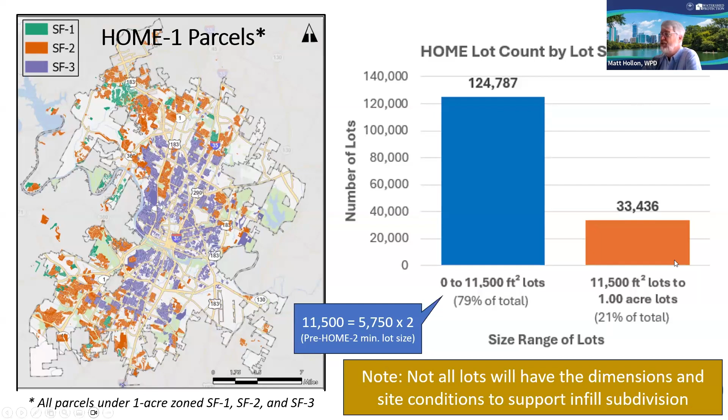These larger lots, the 33,000 that are larger than 11,500, are only around a fifth of the total. Not all of these lots, by the way, are going to be able to support infill subdivision for a variety of reasons. So this is kind of oversimplified, but it shows you the number of lots in these two categories—we can talk more about that during Q&A. Some of you will recognize some of these slides, which I initially created for our October 4th stakeholder meeting, where we had some good feedback as well.

So this is in Northeast Austin—it's basically almost literally a random neighborhood I picked out using our mapping systems, but I'm overlaying a HOME-1 project on top of this.

In fact, that's what we're seeing with the HOME-1 data available online now. Our DSD staff have put together a good summary of what's going on and how many permits have come in. Most of the permits are coming in as 2-unit projects, not 3-unit, although there are a fair number of 3-unit projects.

So let's say these folks in this project decide they own that property and say, hey, we're going to put 2 units in. Great, so they go forward with no fanfare. There's no drainage requirements for this, just like if you built a single home next to them, there would be no specific drainage requirements. You're not allowed to flood your neighbors. There's state laws and plumbing code provisions that kick in for drainage on individual single family homes, and that too would apply to a HOME-1 project. But there's no special drainage code that kicks in because this project is so small.

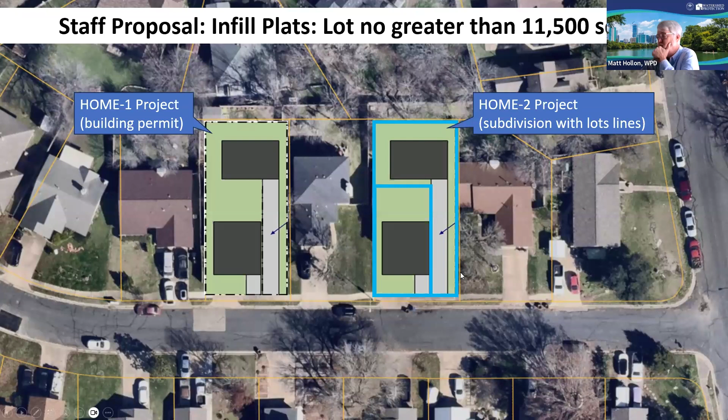But we put the applicant through a lot of extra steps to come up with this as a subdivision, because up till now we haven't had a way to discern between a very small project and a larger one. So our proposal is for these projects that are less than or equal to 11,500 square feet, that we treat it the same as we would a building permit project next door.

So same deal, no special rules, no additional anything. You're not supposed to create drainage issues and so forth, but at the scale we're talking about, we're not generally seeing very many of those kinds of issues. And there are recourses, and I know that's another community discussion we can have. But we think this is appropriate.

And when I show you the peer city review, our peer city of San Antonio has a really similar threshold of 10,000 square feet. It's very close to our 11,500, where they say basically the same thing, and I think we're in good company with that. They had some experience that led to that conclusion that I'll share as well.

So I already went through some of this. In the past, you couldn't even subdivide something of this scale or smaller, except with some cottage lot kind of oddity exceptions. So this will be the first time, and you wouldn't have to do a drainage study, you wouldn't have to do on-site detention, anything like that for this very small scale, because we're not asking that of individual homes right next door either.

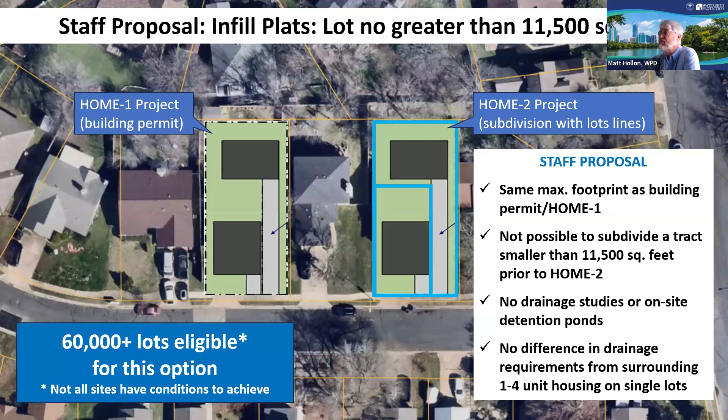Now there's probably many tens of thousands of lots that are eligible for this option at this point, so we're opening this up for quite a few properties.

So the planning commission proposal was much more broad, and they basically recommended that if any of these projects, all the way up to 1.5 acres in size, remain within their zoning impervious cover limits, that you would have no extra drainage requirements. At this scale, we're okay with that. Honestly, every single project is going to stay within their impervious cover limit, or that's the idea.

I know there are board of adjustment issues that pop up here and there, but generally people stay within their impervious cover limits and don't propose going over, because they'd have to get a variance and go through a commission process to get there. They also mentioned, it's a little wonky again, what the planning commission called the Dallas affidavit system for self-certification.

Dallas does have a system where, for individual single family building permit projects, if you're in the floodplain, you have to submit a grading plan for your project. But if you're not in the floodplain, the applicant can say, hey, I'm not going to create problems for my neighbors, and sign an affidavit stating that, and that they will rectify any problems in the future if they arise. We'll talk about that more later, but that's different than having city staff review it.

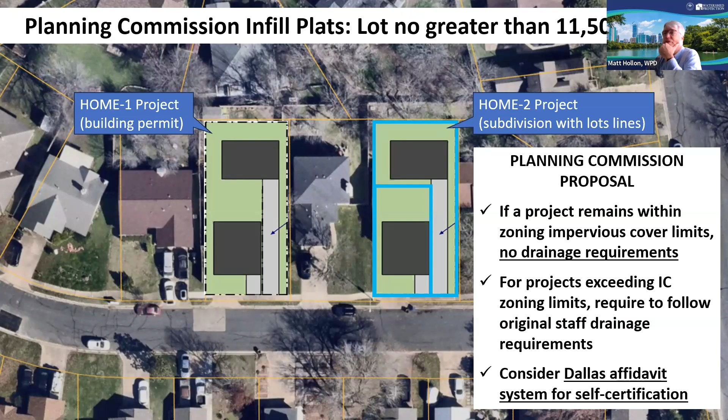Okay, so that's the planning commission proposal. So far we're not that far apart on this one small scale issue.

All right, so then we turn to the Infill Plat, to a larger size. You're above 11,500 square feet. Here's an example, a half acre project. City staff believes that this scale above 11,500 is large enough to warrant additional engineered or detailed attention.

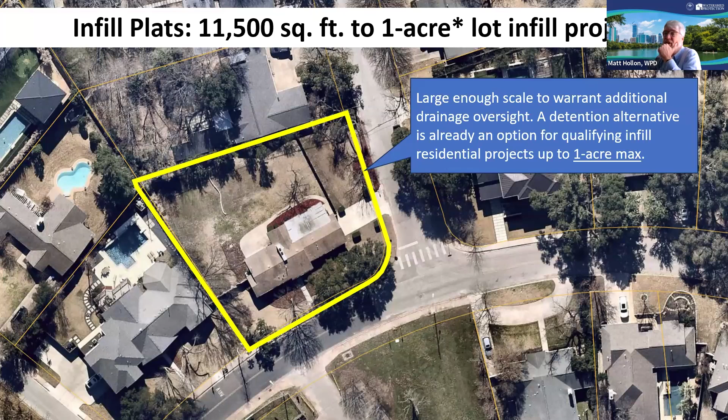We also recommend that it not exceed 1 acre in size for this option. That would mean if you're bigger than 1 acre, you'd follow the full code system, all requirements. So here's, I know this is a terrible sketch, this is me attempting to put some units on there, and I think it's about what could happen.

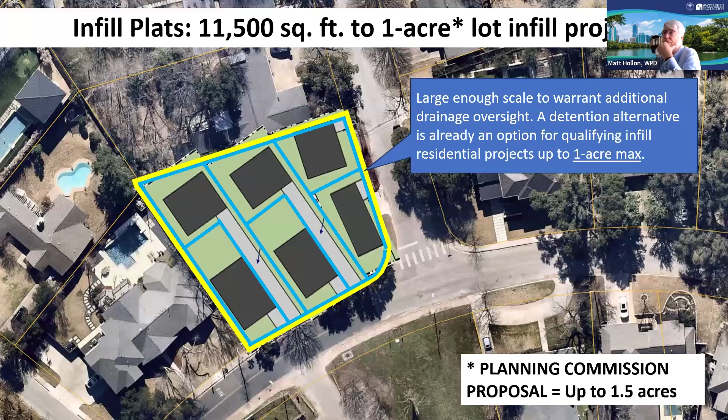The planning commission proposal did propose up to 1.5 acres. This is a half acre site, so it would be two more of these together, that's the scale they were recommending this apply to.

So our city staff recommendation - again the planning commission version did not refer to topography or grading or anything else. The staff version has more nuance to it.

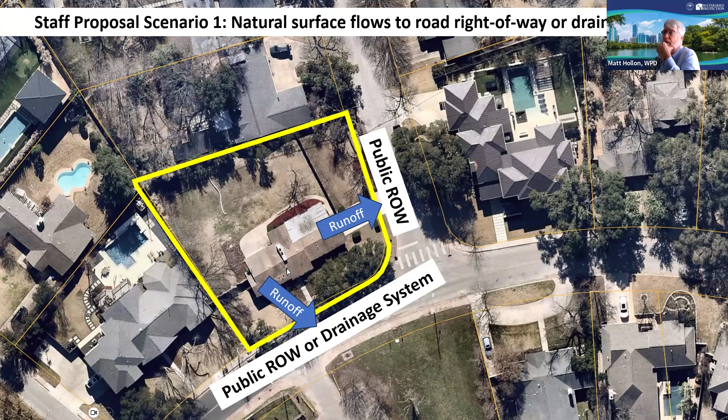Staff actually says, look, if you have a site where the runoff is conveniently going from your site into the public right of way, or maybe there's a creek next to you or a drainage easement, that's great, that's the best case scenario, that's where we want the water to go. So if you're in that situation, you can do a simplified grading plan where you just show where the water's going. Honestly, a homeowner could probably put this together using information off our website, and you wouldn't have engineered elements like ponds, or regional stormwater management program payments with this proposal.

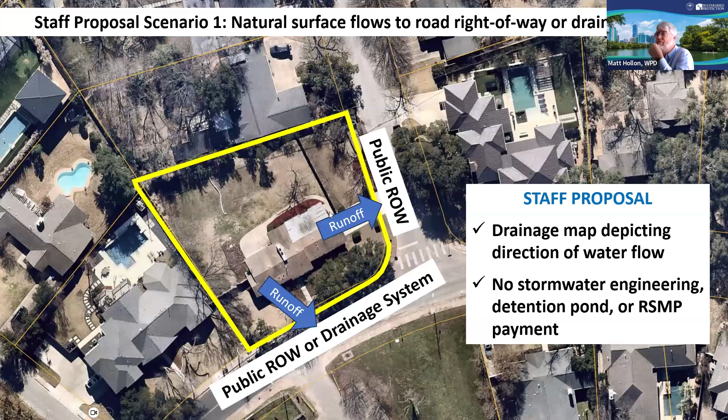Development community representatives, when they saw this, were like, hey, that makes sense, we like the simplified version. That's great, but not that many sites are going to just happen to all drain to the public right of way. So what happens if that's the case? What do you do?

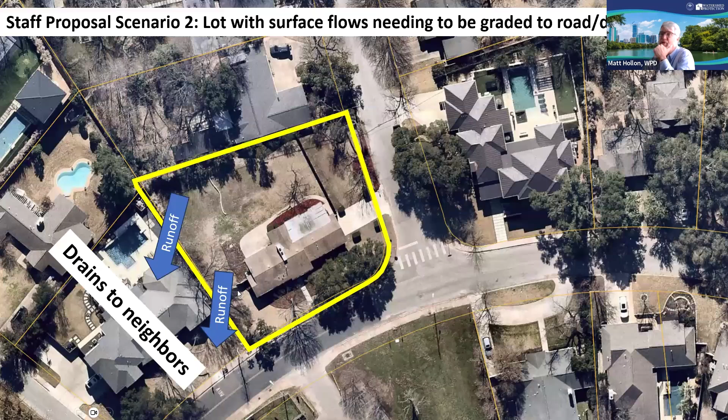That is the next scenario - scenario 2 of 3 - where maybe some or all of your runoff goes to neighbors. Maybe some of this is going to the street, but some of it is draining to the neighbors. In many cases, you can actually get in with some earth moving equipment and create a swale or French drain or other kinds of systems to redirect the water so it's not going on your neighbors, and get it to the public right of way system.

Initially, this is a little more complicated. We want to make sure that somebody gets this right and has oversight, and somebody with competency in this area is involved, to make sure there's a good plan and it gets executed.

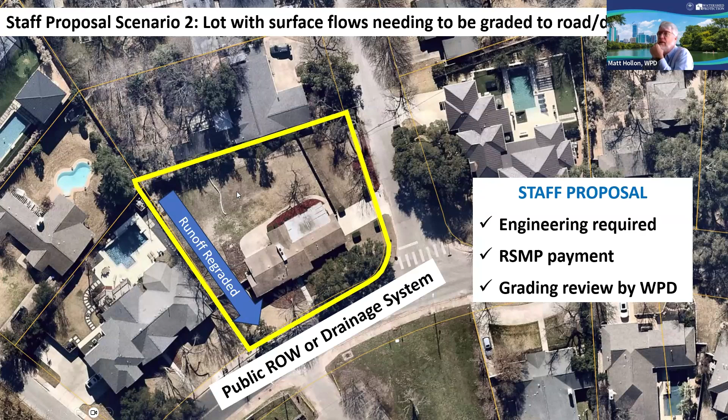So initially we proposed that engineering be required, and there'd be a regional stormwater management program payment. This is a really key point - we actually already have this in our drainage criteria manual. This system has been going on since 2019. We've been allowing projects up to 1 acre that are single family residential subdivisions to regrade and do this kind of thing, but we have oversight, we look at them, make sure they get their project done, and we ask for payment.

So in our updated version of the ordinance, after looking at and wanting to come together a little more with the planning commission version, we are agreeing to remove the regional stormwater management program payment, which on average has been, at least in the past, about $33,000.

It just depends on your site, the site conditions and the size of your site especially. But projects would probably save $20, $30, $40, $50,000, sometimes even more with this new proposal. That money was being used to put into a collective fund for each watershed that would be used for different projects, so watershed would need to shift a little bit to make sure we cover that.

But our department director said he supported that new plan.

And then we have grading review. Right now with the drainage criteria manual system we have in place, watershed protection staff is overseeing this, but our colleagues over in DSD are doing the same exact kind of review themselves for other types of projects, so we would be shifting that over to them for this proposal.

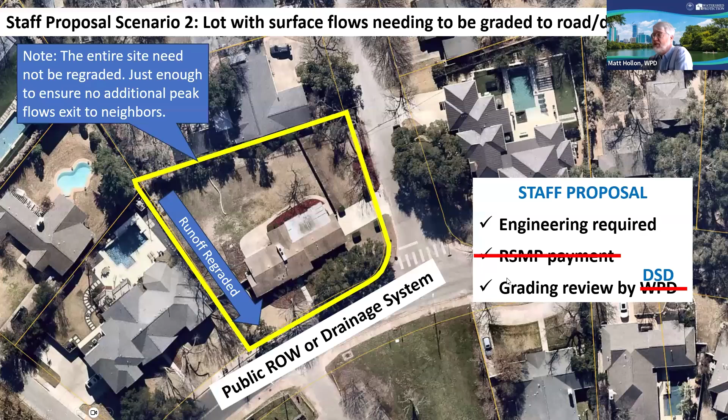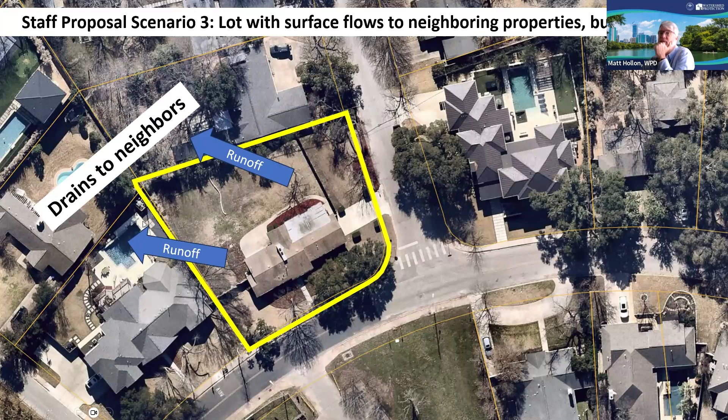All right, the third and final scenario on this one is that this water would just drain to your neighbors. And this, in fact, is what happens with this particular lot in the real world - it just kind of drained right to the backyards of these neighbors.

So our staff proposal is that you would continue, as you do today, to have to put in a small scale detention pond in this kind of project to reduce the flow rate of peak flows coming through your project during a big storm, to have an engineered control there.

And so in meeting with some of our development community stakeholders, they had met with some of their engineering colleagues that they work with, and a lot of folks recognize that something of this kind is needed when you have a big enough project and you've got enough water going off.

And we do - this is blue because we're changing this. We staff are wanting to look at some simplified detention options. We heard a lot of good feedback from stakeholders that building detention ponds was, especially for these very small projects, somewhat cumbersome and complicated and added a lot of cost and time to the projects.

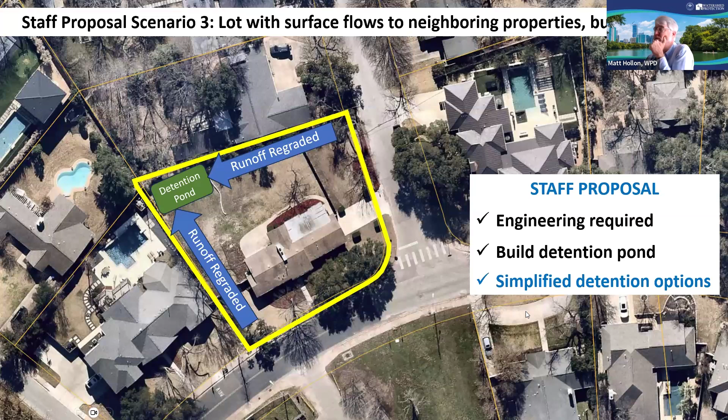And so we will be looking at whether there can be some simplified options such as rainwater harvesting or other systems that might be of use and might even be multi-purpose and helpful.

All right, and so then back to the Planning Commission proposal. This project, if it just stayed within its impervious cover limits, would not have drainage requirements all the way up to 1.5 acres, with no regard to the drainage - whether it goes to the road or back to the neighbors. So we staff just really have some concerns with that and don't support having it go to that size, and we don't really think it would be enough to have this impervious cover limitation.

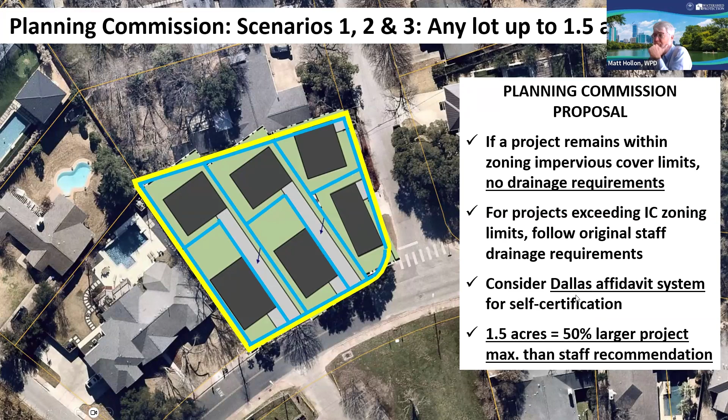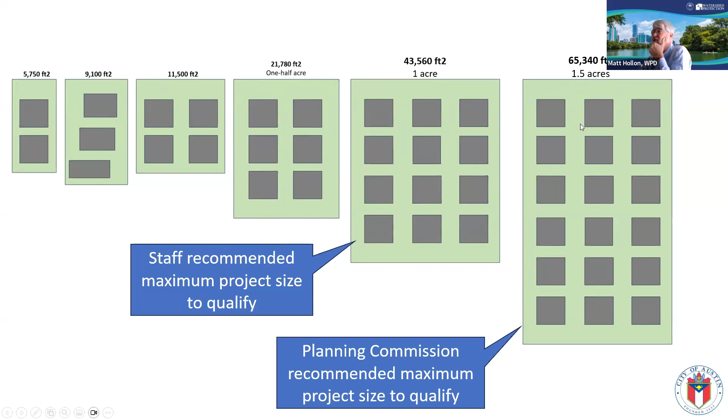But again, if any of these have some or all of their water running to neighbors, they'll need to either regrade or use detention. And then the planning commission version requested that it be boosted all the way to 1.5 acres. All right, so I'm going to go to site plan lite part 2.

These are small scale multifamily projects. They're not 158,000 lots like this - there's far fewer, only 7,000 or 8,000 of these in town at this point that are zoned like this. And honestly, a lot of these are pretty small and probably would have a real hard time putting more units on them that are already there. So anyway, some of our stakeholders have had good comments about the limitations that are already on these projects, these parcels.

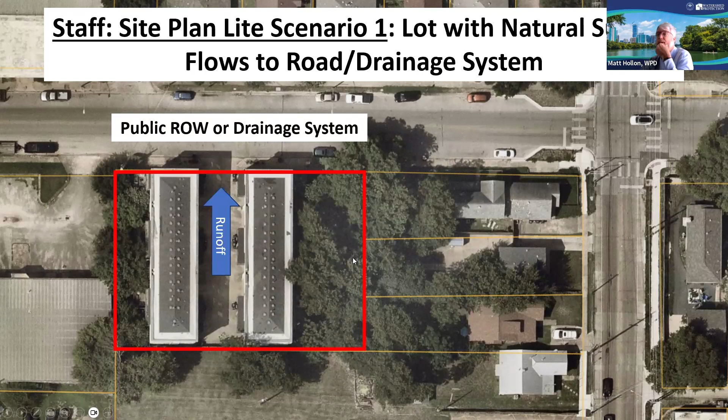So here's an example one over in East Austin, where somebody's already built this. It's literally a 1/2 acre site - this is in fact what happens in this particular project, but I'll show you some hypotheticals here too. So it runs off to the street above here, and in their project, they just graded it so it got right to the street. So they would have a simplified version of this where they were able to just show the water going to the street.

And so it wouldn't require the same level of engineering. There's going to be an engineer on this project already. They would probably oversee this, but it'd be pretty simple to do this for them for this version.

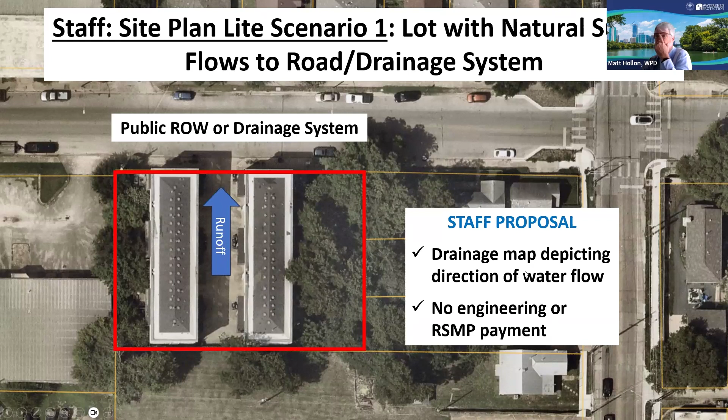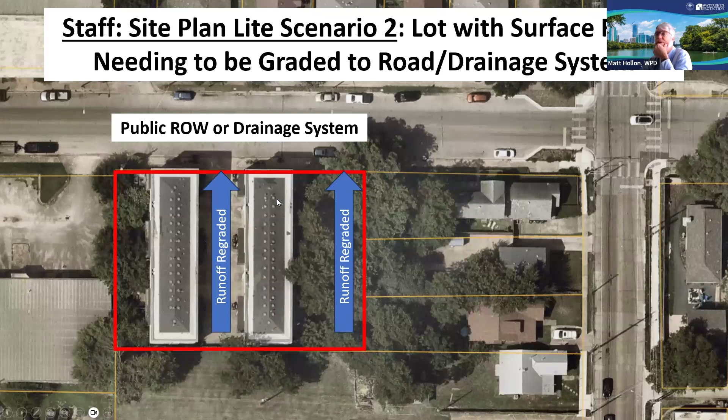In the next version, again like the other single family one, subdivision one, this one kind of runs off to the neighbors, hypothetically. You'd have to drain it, regrade that, and make sure that did not happen in your final plan and implementation. So with that, you need engineering. Initially we said, how about a payment and grading review by watershed? So we're updating that for no payment.

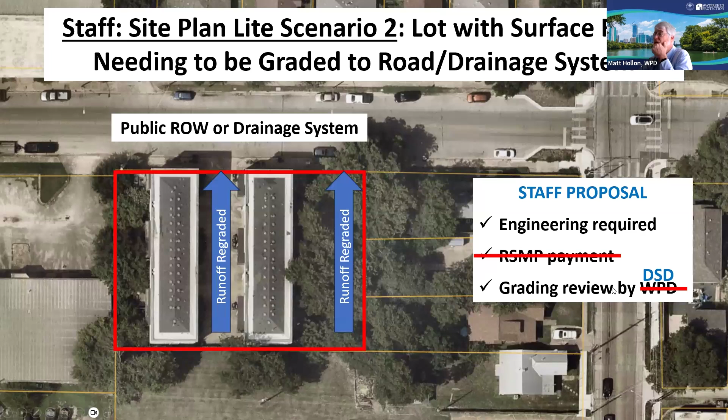So again, acknowledging that council is valuing these small scale housing projects and wanting to streamline the process. We know that that's a barrier sometimes, that money.

And then the runoff, if it just drains the neighbors and is a problem, then you would put in a detention pond, just like that last one. And again, we'll be trying to come up with some simplified detention options for these smaller projects.

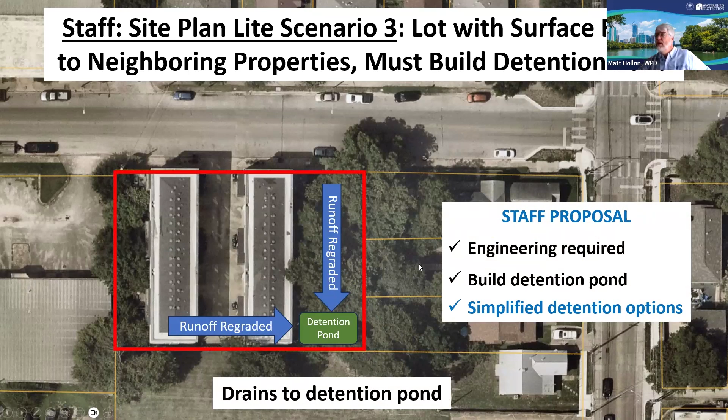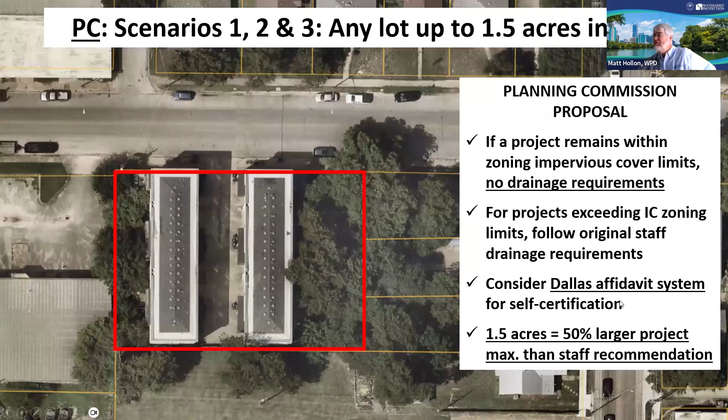Planning Commission for this one as well said, as long as they stay within their 65, usually 60 or 65%, impervious limits, then you wouldn't have any drainage requirements, other than just following state law, self-certification, and all the way at 1.5 acres.

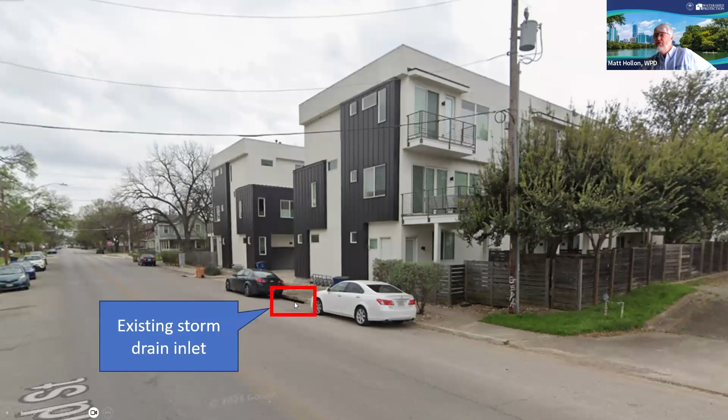Here is this project in reality. And the water comes out and actually drains into this storm drain inlet. So we have some separate proposals that help these smaller projects from a cost standpoint with storm drain connections.

And I just thought this was interesting: this project put in 10 units on half an acre, but they were able to protect these protected trees with the type of design they put in. So I just want to acknowledge that with HOME 1 and HOME 2 and this ordinance, we're holding the line on impervious cover limits, and we're retaining things like tree protections that were already in place.

All right, don't despair, I'm getting close to the end of this presentation. I hope this hasn't been too much detail. But this slide shows an overview of 4 other cities in the state and what they're doing.

So I mentioned earlier that San Antonio has this. It's a little more complicated than this. San Antonio has this kind of 30 square mile area of their original city that has this kind of infill zone where they're encouraging infill, and they came up with this.

They initially came up with a threshold of 20,000 square feet, and said you don't have to do extra drainage requirements for that. But they found that they were getting a number of 311 calls and complaints, and so that was in 2015, I believe - double check me on that, it's not crucial about the dates but I could get that if you need it. I think it was 2015. They said 20,000, and I think by 2020 or 2021, they went ahead and adjusted it down, calibrated it down to 10,000, to try to tamp down the number of drainage issues they were getting.

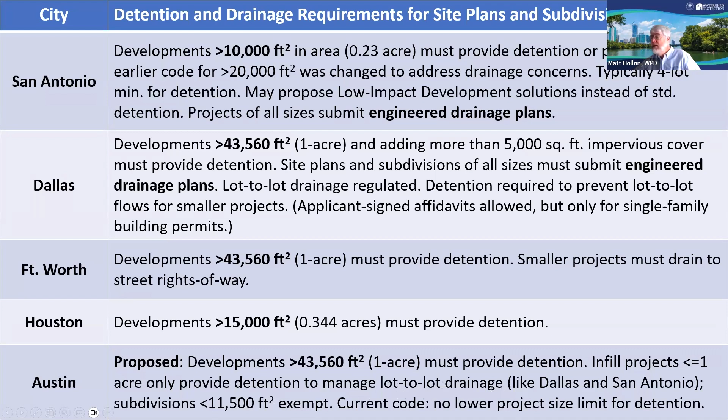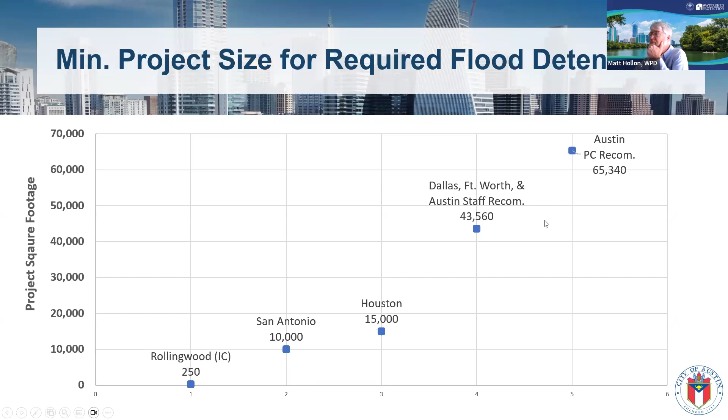Our little sister city, Rollingwood nearby, actually regulates all the way down to 250 square feet of impervious cover. I think it'd be a little tricky for a gigantic city like Austin to follow in those same footsteps. There's some background on why they do that, but anyway, it's just an interesting footnote. So staff don't recommend pushing past these other cities.

We're hopeful as staff that we've made some progress on getting to a place where the development community feels like these barriers - that were the main point of the city council resolution - were to say, how do we streamline this process and make sure that folks can make these projects feasible and have them actually built, and have people be able to move into these smaller units with more different housing options.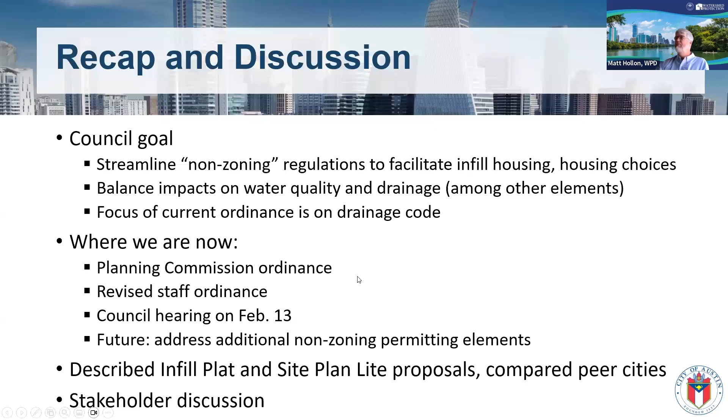And I went through and described these two different proposals, talked about our peer cities, and now it is a good time to talk about stakeholder discussion. So that's my last slide wrap up. I'm going to stop sharing, but I can come back to this if needed.